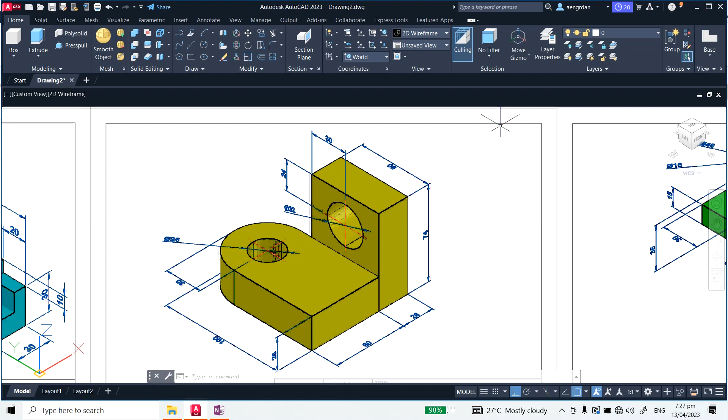In this video, we will do another drawing exercise for our laboratory number 7. Here's our 3D model, and as you can see, this just consists of the basic shapes. We have a rectangular shape here, subtracted by this circular or cylinder here.

And right here we can use a polyline, or we can use a square or a rectangle and circle. We union that and subtract another circle here, or another cylinder.

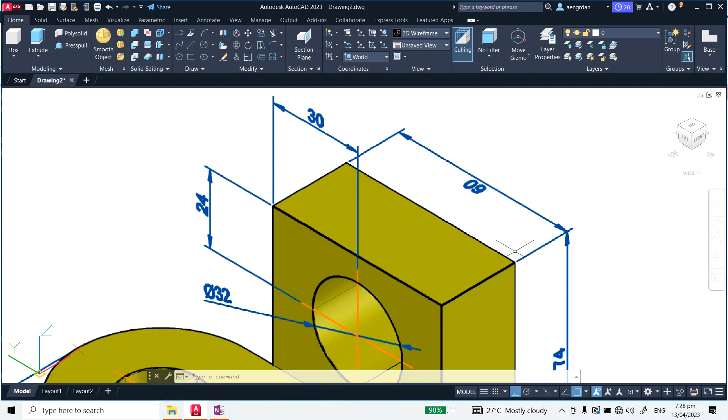So to start, we need to just draw one profile. I'll start from this point. I need to draw this, finding this dimension, which is 60 and a width of 26, and then extrude that to 74 units. Okay, let us do it here.

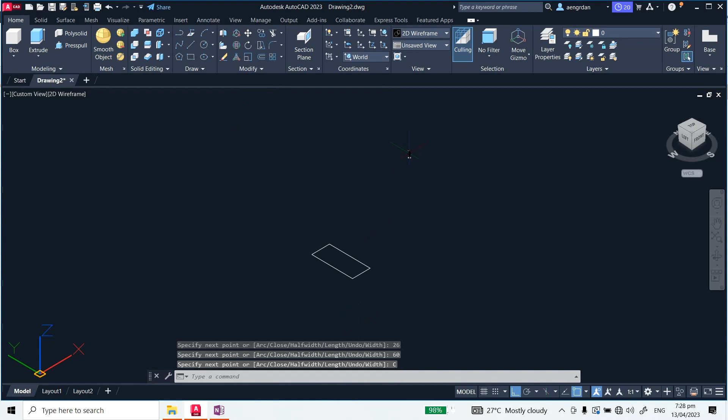So type PL for the polyline. We have 60 for the length and 26 for the width, 60 again, and type C for close. And I'm going to extrude this 74 units, right? So that's my first part.

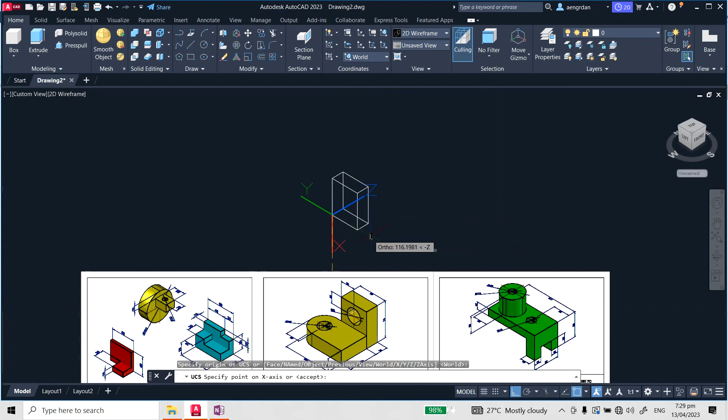In order to draw this circle here, I need to change my UCS, my User Coordinate System. So for the UCS, you just click this or type UCS, select the origin, select the x-axis, and select the y-axis. So as you can see here, here's our x-y axis, that's the plane we're in, where we can only draw.

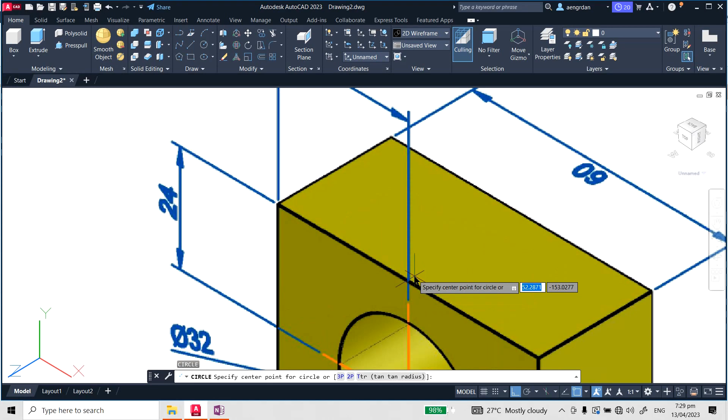So to draw this, we need the diameter 32 and the center point. The center point, actually, it's as you see here, 30. Here's 60, so the center point can be in this midpoint. Okay, so that's one way, or maybe we'll just select this as our center point, and the diameter is 32.

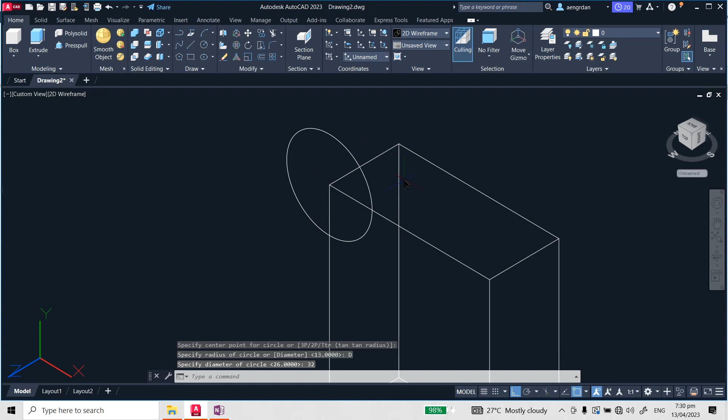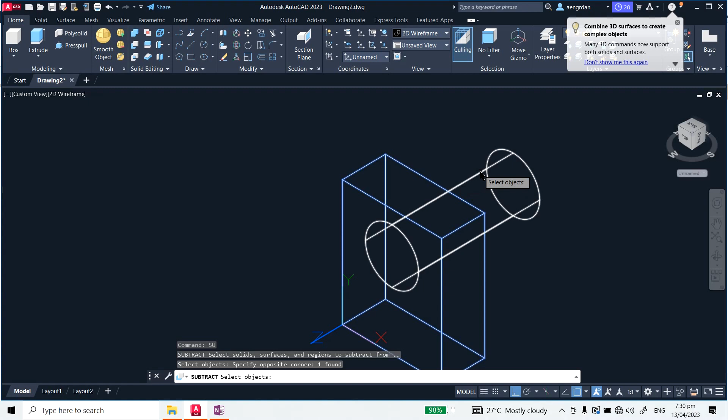Okay, and then extrude this. Let us move this 30 units along the X, right, and move downward 24 units. So we subtract, SU, for select the first object and the second object. Okay, so that's our object here.

So now the next one is this portion. To do this, I'm going to combine this rectangular shape and this circular shape, maybe. So 100, if you can see the total length from this end to the tip here, that's 100. But if we want up to this center only, so 100 minus 30.

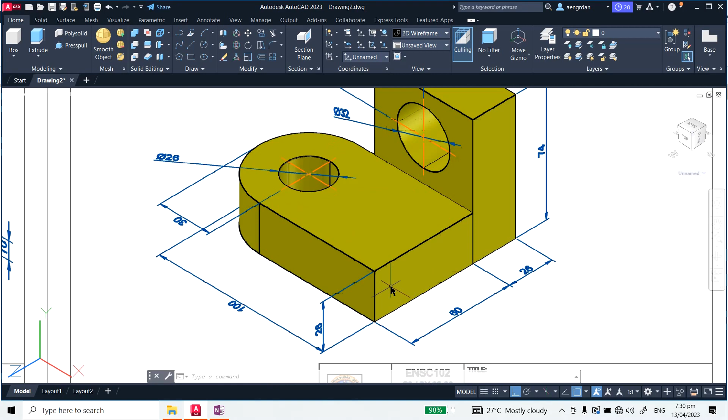Okay, so change my UCS once again, and then I'm going to type the polyline, 70, and type 60 for the length, 60 and 70, and then type close.

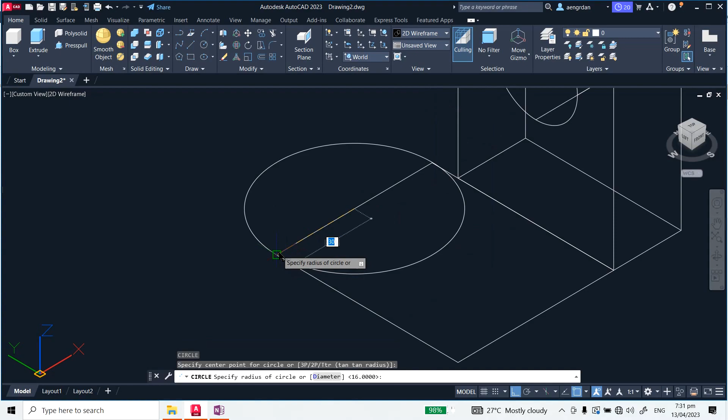Okay, next I'm going to create a circle. So that's the diameter, because we have our center point and all the way to this end of this profile. And I'm also going to create this small circle inside, which is 26 units in diameter.

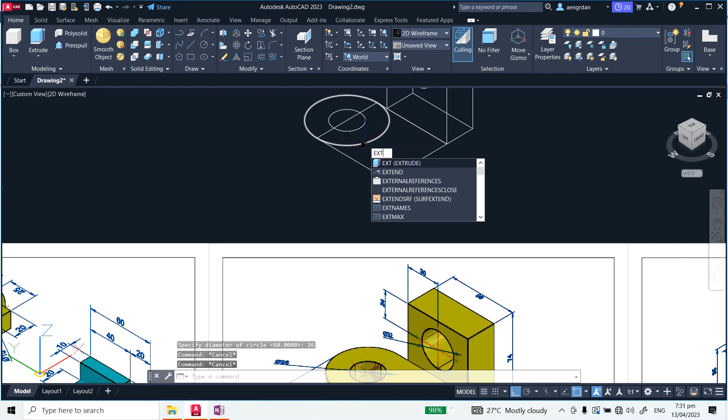So diameter is 26, and now let's extrude. Let's extrude all three together. So extrude, what's the height? The height is 35. So type 35, and that's it.

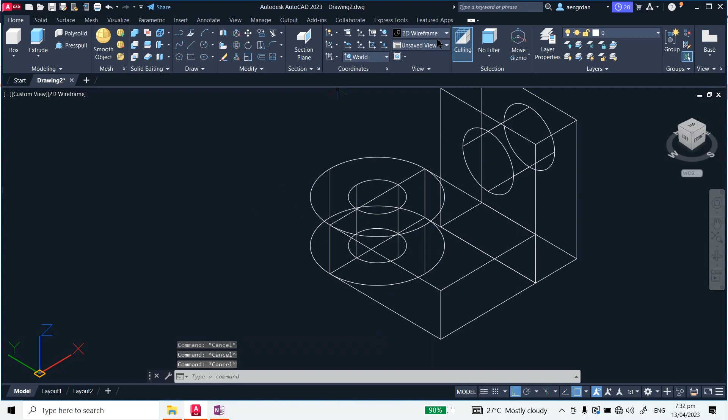So first, let us union these two objects, this object and this one. Let's union that, or we can change our visual style. So type union, or you can just select union maybe here, solid tab, and union. So click this, and then subtract. Select the first object, press enter, select the second object, and there it is.

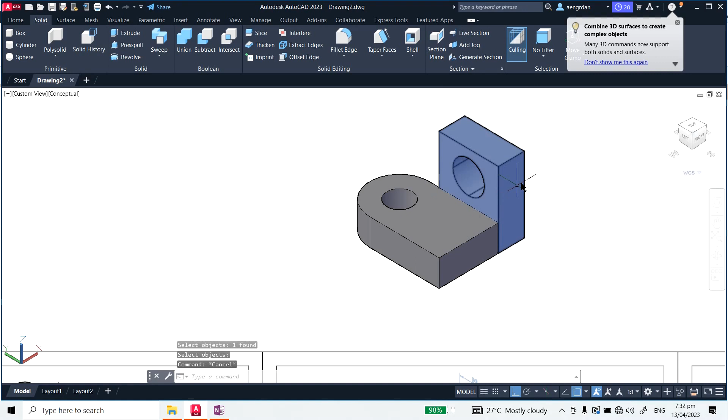So that's our, maybe change the properties. Maybe we need to change it to green and then put dimensions. So that's just it. Okay, next one is, let's do this.

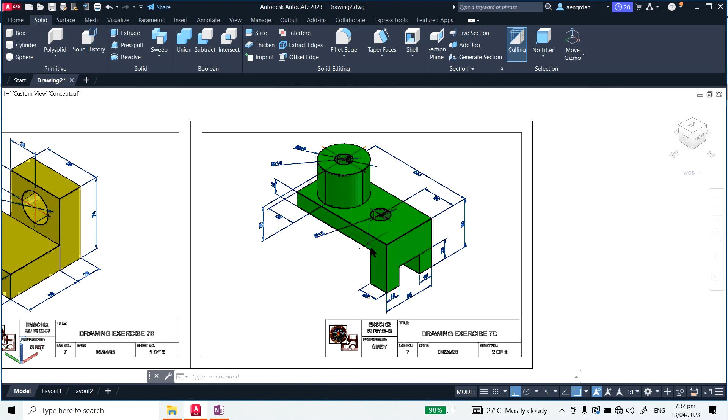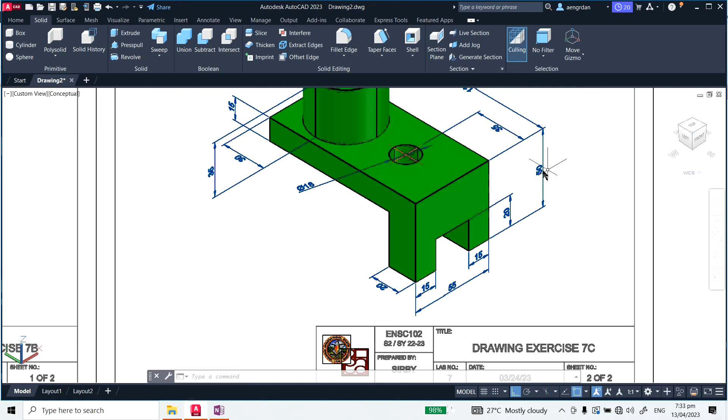Okay, so drawing exercise 7C. First, maybe we need to draw this L shape first, this profile, L profile, then extrude, because that's going to be my base object. So we have the 110 length, and the width as well, that's 55. The height is 50, and we have this distance, so we can do offset, and right here we also have distance.

So let me draw this first, this L shape profile. What we need is 110 and 50. Okay, so back to the wireframe. Okay, so I'm going to change my UCS.

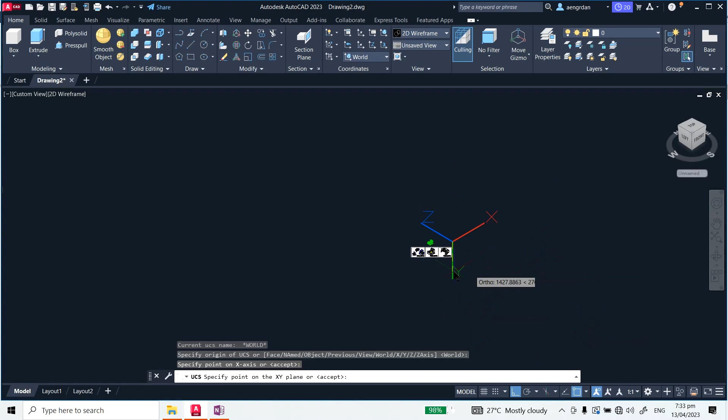Okay, so as you can see, here's my UCS. So here's my X direction and Y direction. Okay, so type polyline.

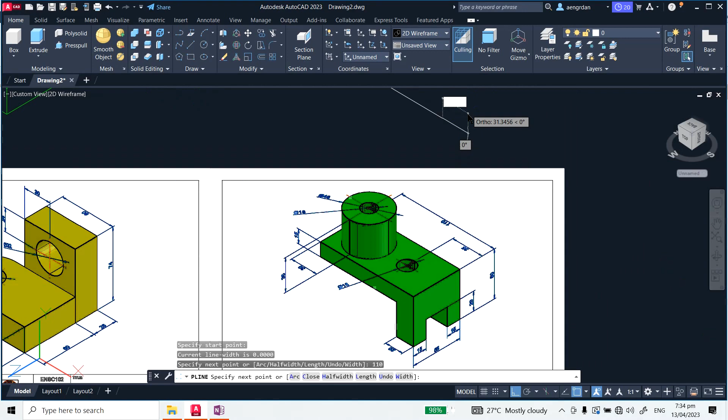We need a unit of dimension of 110 and the height of 50. Okay, so that's our lines.

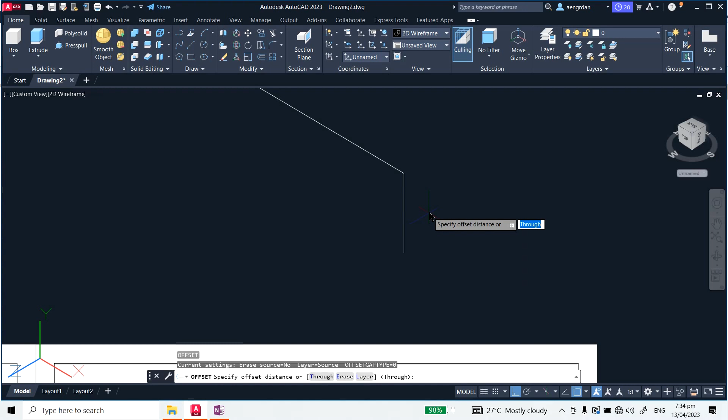Okay, so next one is, I'm going to offset this 20 units and this one 15 units. So to do that, since this is a polyline, maybe I'll need to explode. Type X to explode this object, because we have two different offset distances. So type O for the offset, type the offset distance and then click the direction.

Okay, next offset, type the offset distance of 15, and then we can connect these lines here to draw the profiles.

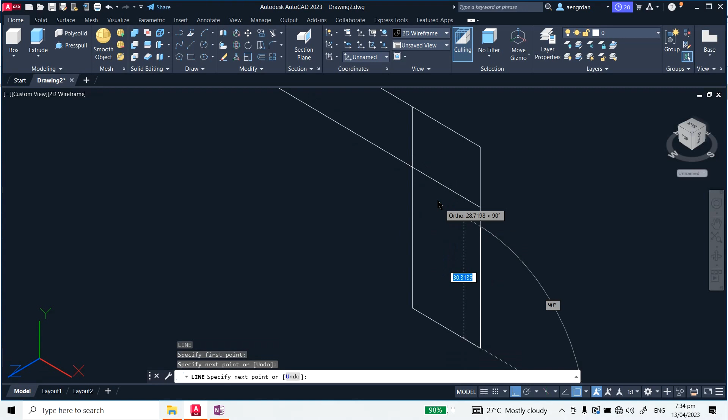Okay, and then trim this inside. Okay, so now we are going to make this as one object.

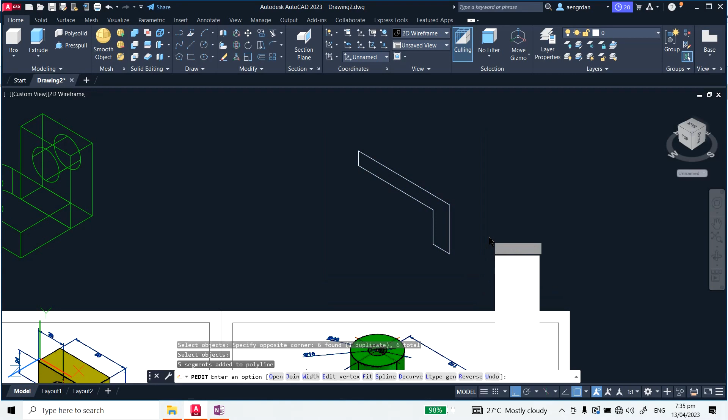So p-edit, edit polyline. Maybe here in the modify you have it, edit polyline, or just type p-edit and select one object in that polyline first, and it asks do you want to turn it into one. Then just type yes, and join, then select all the objects you wanted to join. Press enter, and if you check, it's one object already.

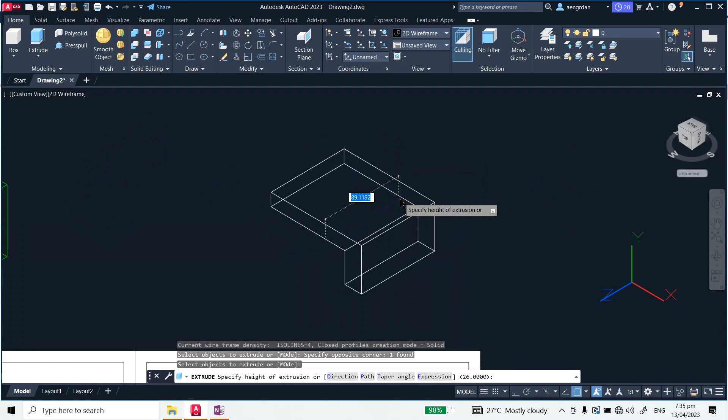So now I'm going to extrude this 55 units. So extrude, EXT, or you can just find it here, maybe click this, right? Extrude, and what was the unit? It's 55, right, so type 55.

Okay, next one is, maybe I'll do this first. So as you can see, we have a unit of dimension of 15 and 15, so that makes it 30. So 55 minus 30, so we have 25 here, 25 in this direction, and 20 in this Y direction, 20 by 25.

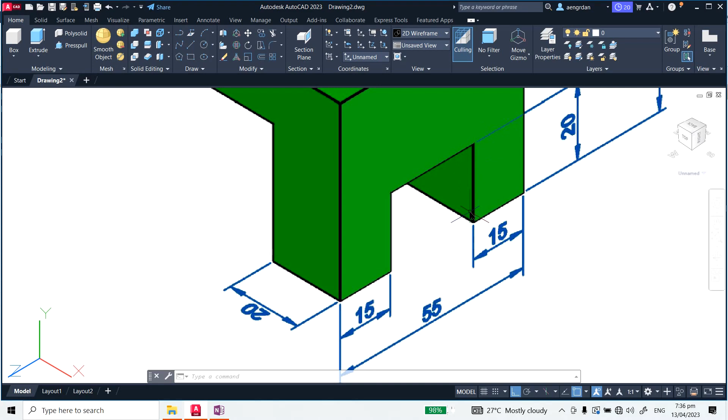So I'm going to change my UCS first in this plane. So type 25, and then 20, then 25, and then type C.

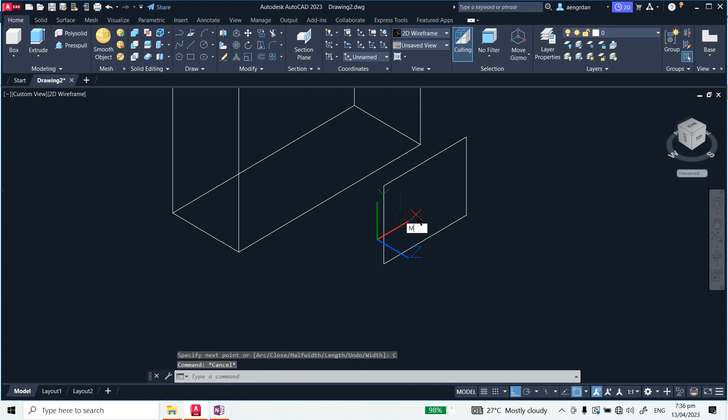So if you can notice that I draw this rectangular shape away from this object, it's because we can also move that, right? So if we move this object, I want this base point to be at that base point.

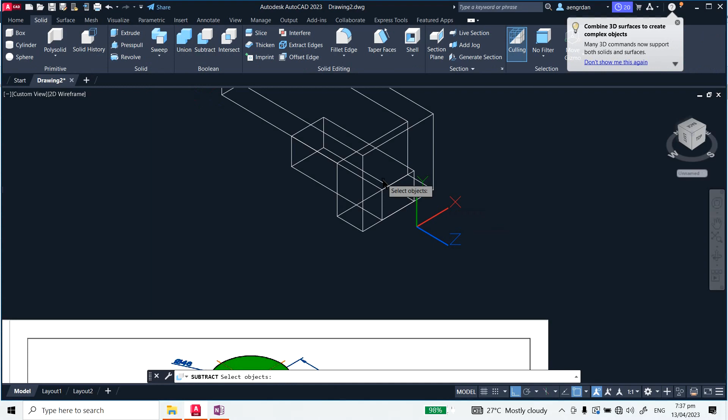Okay, so next step is to extrude and then subtract. So subtract is, let's do this. Click subtract, select first object, then select second object.

Okay, next one is, let's draw this cylinder here. The diameter is 46 and inside diameter is 16. So let's do that.

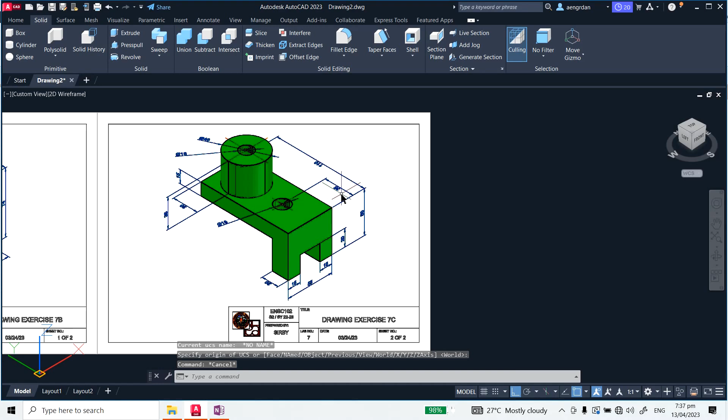You can also create it based on what's the distance we have from this edge to this quadrant. We have 30. So I suppose the center line of this, or the center of this circle, is collinear or coincides to this midpoint here and also the center.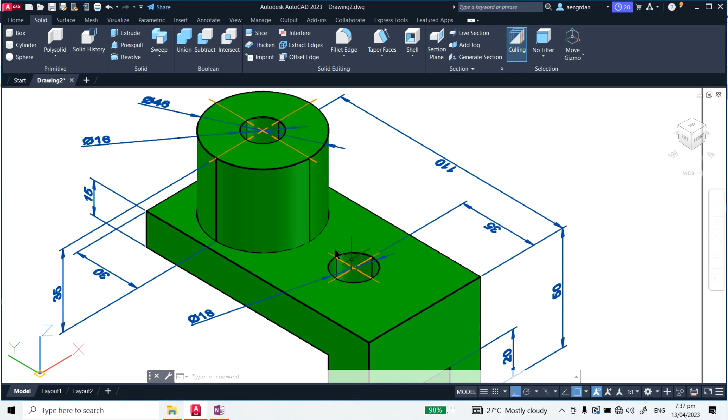So 46 and 16. Type C for the circle, type D for the diameter, 46, and next one is the 16 diameter. Okay, so that's our profile.

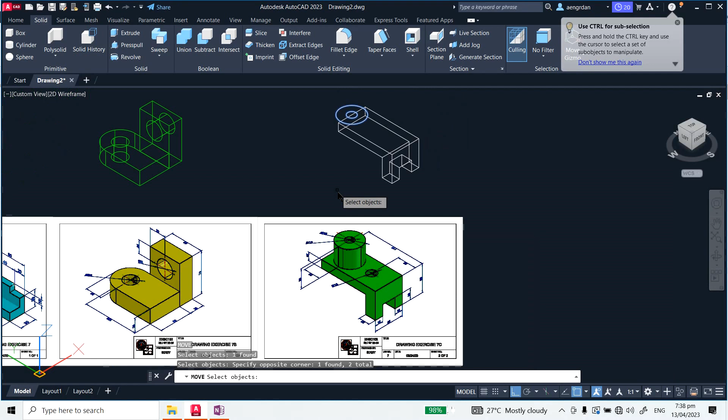So now let's move this. I want to move this 30 units along the Y direction. Alright, so 30 units here.

Okay, and next is extrude. So the extrude height is 35. So extrude is 35, so we have 35 units.

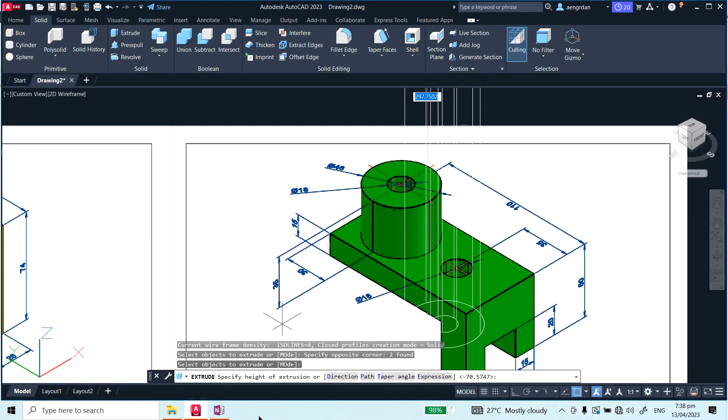Okay, so we don't know actually if this inside diameter or inside circle goes all the way through this object, but we can also do that. So I'm just going to copy this and extend some more length, so that when I subtract, the hole here will be all the way through this part.

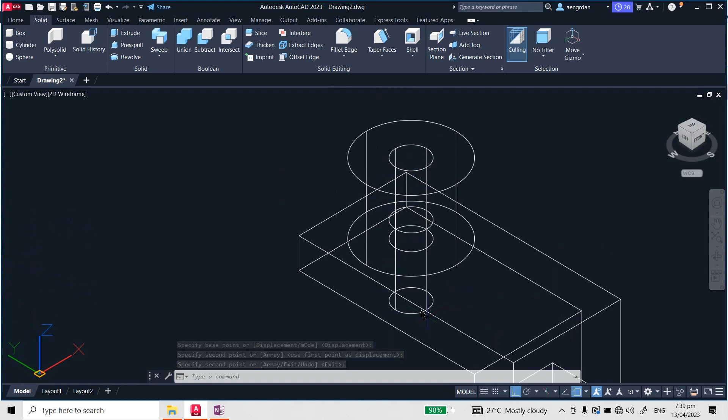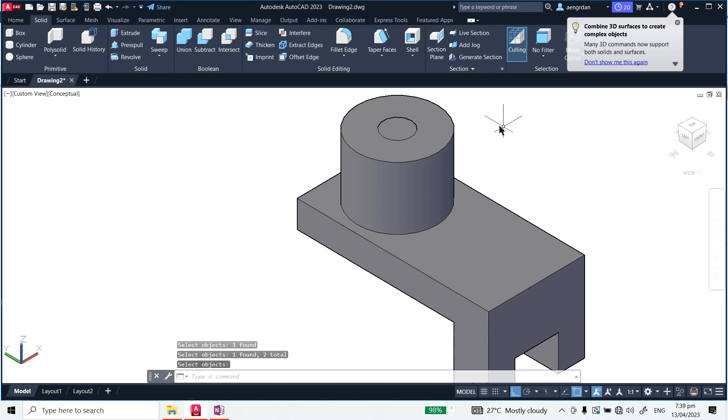Okay, so we can do subtract now if we want. Maybe change to conceptual style, then maybe first unite or do union for this and that, and then next one is subtract this. So subtract, select first object and select this.

Maybe we'll use 2D wireframe, right? So for the subtract, select our object and then press enter, select the second objects.

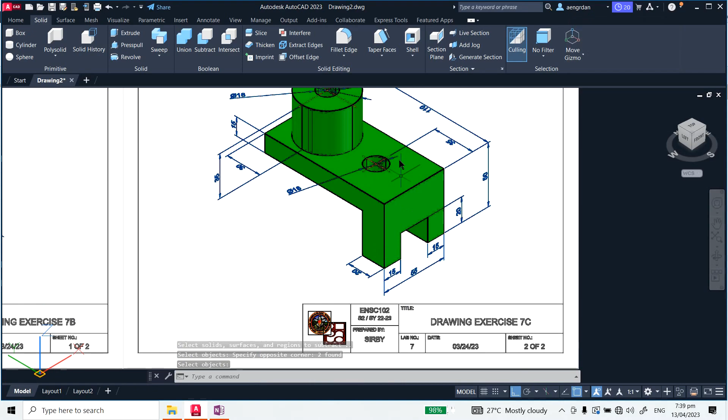So that's it. And then next one is to create this 18 diameter hole. So the given distance is from this edge, so that means I'm going to create this circle right here, at the midpoint of this edge.

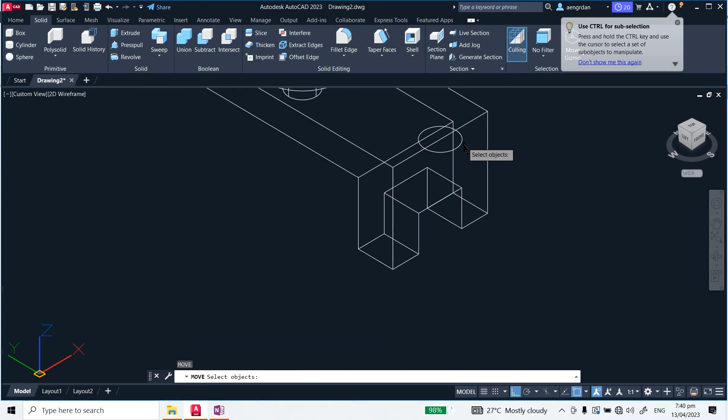So 18, we can type C, then type D, type 18, and then move 35 units. Then since it's a hole, we need to extrude this all the way downward.

Okay, so last step is to subtract. Click this, subtract, and then click the first object, press enter, select the second object, and there's our object.

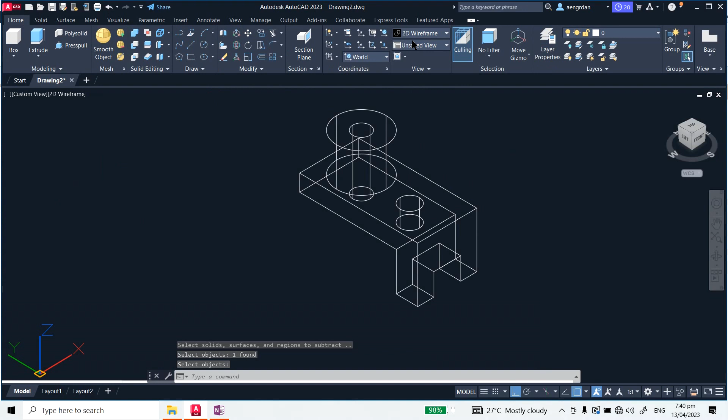Right, so that's just it, I think. So that's all for this. Then you can just put dimensions. Just recall that if you want to put dimensions, just make sure the origin or the planes, because that's where you can actually have the dimensions.

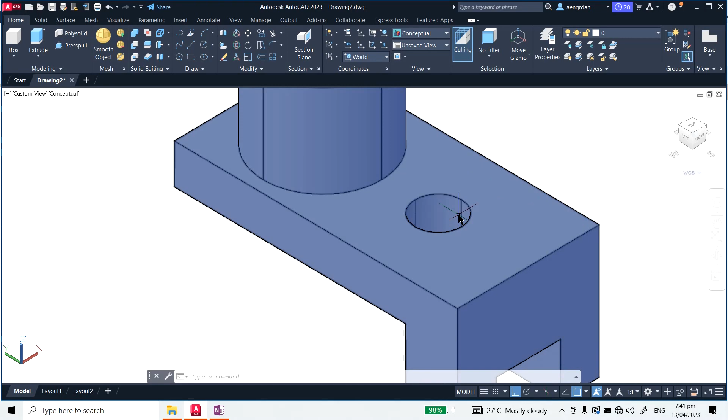Okay, so that's all for this video. In the next video, we will do our drawing exercise number 8.